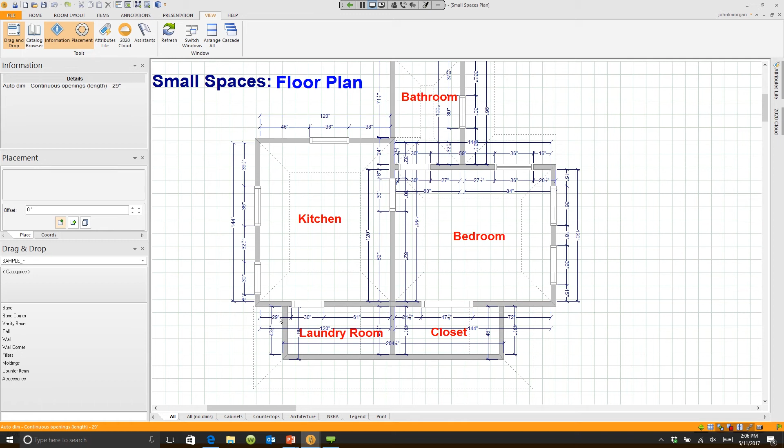Also, you'll notice placement zones. Let's take a look down here at our closet area. When we drew the closet in here, you'll notice that the placement zones are on the outside of the wall. I actually want to place items inside of the closet, not on the outside. How do we quickly address items like that? Well, let me show you. Let's go ahead and close out of this plan. I actually have 4 plans I'm going to work with today. I'm going to go right into dimensions.

Now, I mentioned before, I cleaned the dimensions up ahead of time. That way, we didn't go through all the dimensions. But if you take a look at my system, let me zoom in on the closet area right here. You'll notice a couple of things in the closet section. Number one, I have some overlapping dimensions from this outside wall. Now, I may want to use those dimensions, or I may not. If I do want to use the dimensions, all I have to do is click on the dimension.

Let's click on the dimension, grab hold of the line, and I can extend that dimension anywhere I need. Now it's no longer in my workspace. But a lot of times we hide dimensions. I like to hide dimensions in many cases.

If I wish to remove a dimension from the screen, I simply right-click on the dimension. I highlight it, and there's an option here called Hide. I click on it, that dimension line is gone. I click on this 48-inch dimension line. I don't need the outside of that wall dimension.

I'll hide it because all I care about really is my workspace, which is this 43.5 inches. That's what's important to me. So I can simply right-click on an item, and I can choose Hide to remove it from my screen.

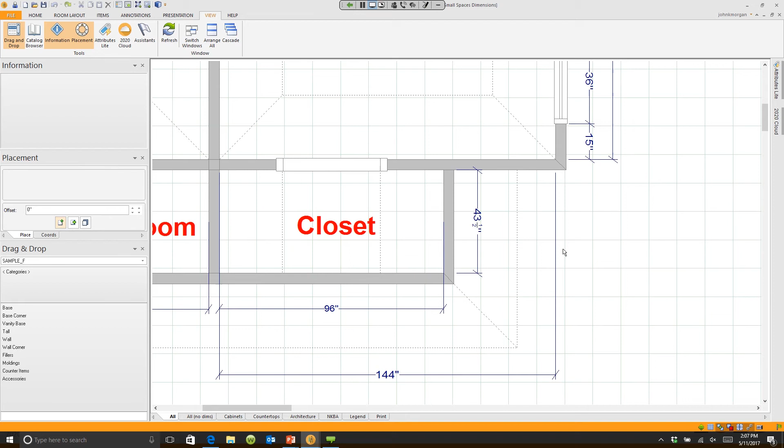Now, where did those dimensions go? Let's say that you hid a dimension by accident, but you want to bring it back. I get that question all the time. Here's the simplest way to do that. Anywhere on your floor plan, not in the work zones, but anywhere on your floor plan, double-click on the plan, and if you give it a moment, it'll open up your display settings.

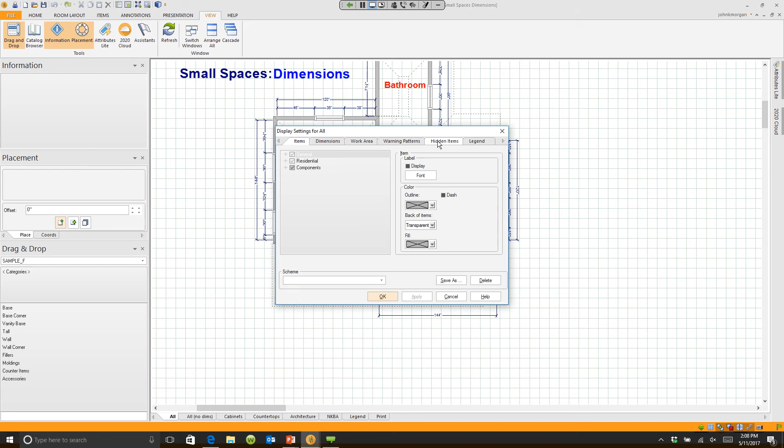The 1, 2, 3, 4, 5th tab over is called Hidden Items, and when I click on it, guess what? All of my dimensions that I hid from that original plan are listed here. So if I move this over and I just click on a dimension, watch what happens. When I click on it, you'll notice down here, that dimension line is the one that's activated.

When I click on that one, it's activated. So you'll see where they are as you click. They'll actually flash on the screen for me as I click, and you'll see the dimension line. For instance, the 204 and the 16th is here. So if you ever wanted to bring a dimension line back, you simply click on it, click Display, and that dimension line will come back.

Now, here's another item that I frequently get asked about. Sometimes when you adjust these dimensions, do you notice the lead and the end line are extended? Most of the time, you're looking to have a dimension line where the lead line is just off the outside of the wall. Well, you can change those.

When I right-click on the dimension and I highlight it, where I was going to hide before, you'll notice there's something here called Extend Left and Extend Right. If I click on Extend Left and move, I can move the left dimension line. And remember, the dimension lines are left because it's left if you were facing that wall. I can move that line down. I can click over here and say Extend Right, move that line down.

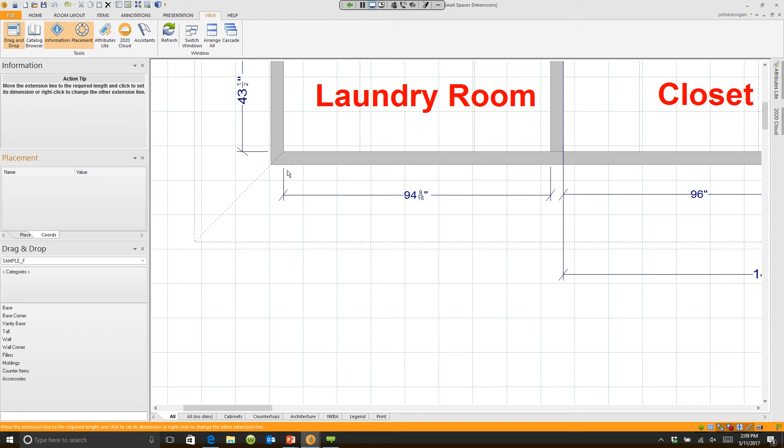And I can do the same thing for this dimension. Highlight it, go down to Extend Left, bring that guy down here, go down and click on it again, say Extend Right. We'll slide that one on down. Oops, hold on a second. I must have stopped. Let me do that one more time. Extend Right. We'll go ahead and we'll bring that on down here.

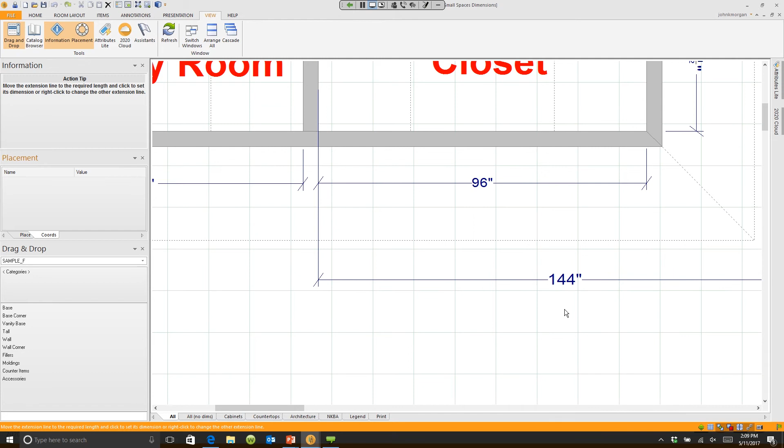Oh, I see what's going on. My 144 Extend Right is actually in the way. We can bring that one down too, and we're good to go. So it's really easy to make changes to your dimensions. Simply by right-clicking on them, you can quickly clean your screen up the way you want it to look.

Now the next question is, how do you remove or change where the boundary lines are for your items? Let's go ahead and close out of this plan. We'll open up the placement zone plan. Same plan, I just already changed the dimensions. So if we take a look at this, let's zoom in.

You'll notice that on this wall, on the bathroom wall, I have extra placement zone lines on the inside of the bath and on the outside of this wall. If we look down here at the bottom of the screen, I have outside placement zones when I really wanted inside placement zones. The easiest way to change this is to double-click on any wall. Doesn't matter which wall.

When you double-click on a wall, it happens to highlight the wall that you clicked on. So if you're only trying to change one wall, click on that wall, and it'll allow you to change it. Now, I already know that the wall's down here at the bottom. I'm going to move this over just a little bit. Wall number 7. If I click on it, it'll highlight wall number 7.

Click on wall number 8, it highlights wall number 8. Click on wall number 9, it'll highlight wall number 9. So I know that walls 7, 8, and 9 I wish to change. I change them all at the same time.

I hold the Control key down on my keyboard, I click, click, all 3 walls are now selected, and while you're in the Properties button, if you click on Type, you can go to the placement zone and turn off either the inside or the outside placement zone.

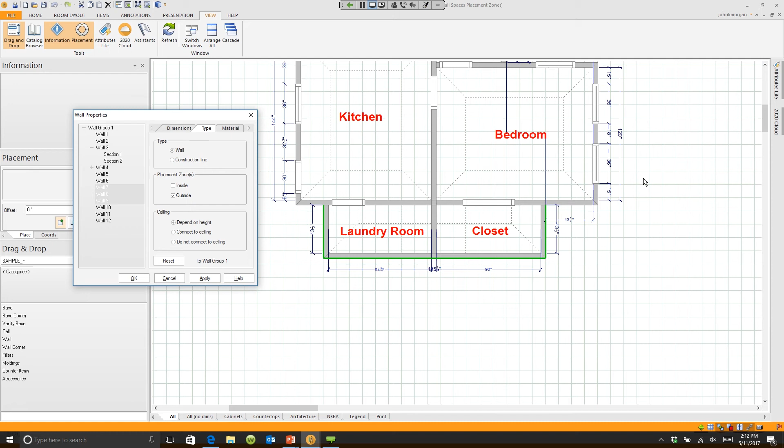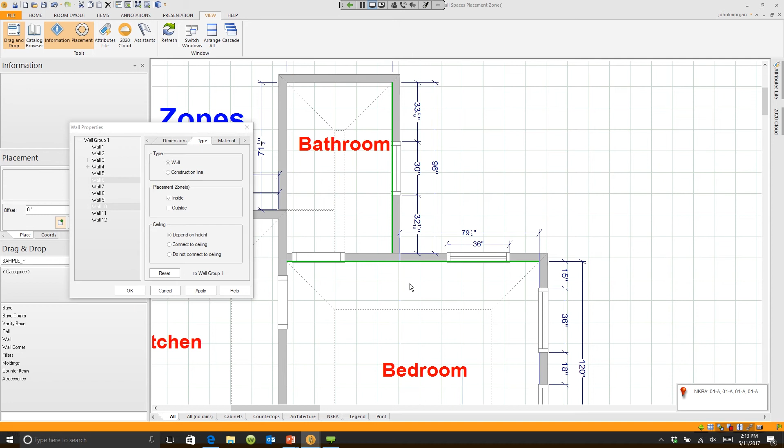Now, the other placement zones that we talked about, let me zoom back up here again, and we'll zoom back in. We're over here. And again, if I simply double-click on a wall, it'll highlight the wall that I wish to change, this 96-inch wall, which was wall number 10, and the other wall happens to be wall number 6. I select both of these. I simply go into Type. I turn off outside placement zones in this case, and all of my dimension lines and all of my boundary lines are going to be exactly as I wish them to be.

Now, you typically don't have to do a lot of that, but I know I get questions all the time about why this is here or why that's there. It's very easy to resolve both of those simply by either double-clicking on the floor plan for dimensions or by coming down here and double-clicking on the wall to move the placement zones.

Now, let's jump back over to our PowerPoint for just a second. Let's move into the second phase, which are going to be some tips for small spaces. I know everybody runs into the same issues when it comes to working in confined spaces and corners in 2020, and you want to be able to quickly place items and have them snap together. Let me give you a couple quick tips for that before I actually start designing a laundry room and a closet. So let's switch back over to 2020.

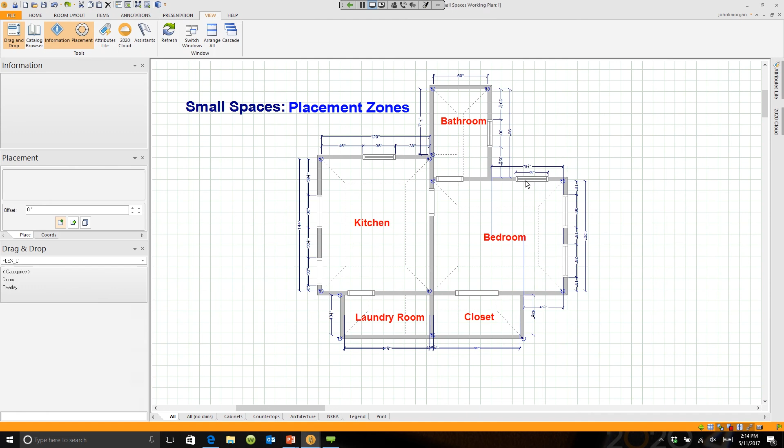We'll come back in. I'm going to close out of the placement zone. And you'll notice that I've taken the same plan. So every floor plan I've shown you is basically the same plan. I just named it different names. And this is the plan where I've designed most of the rooms.

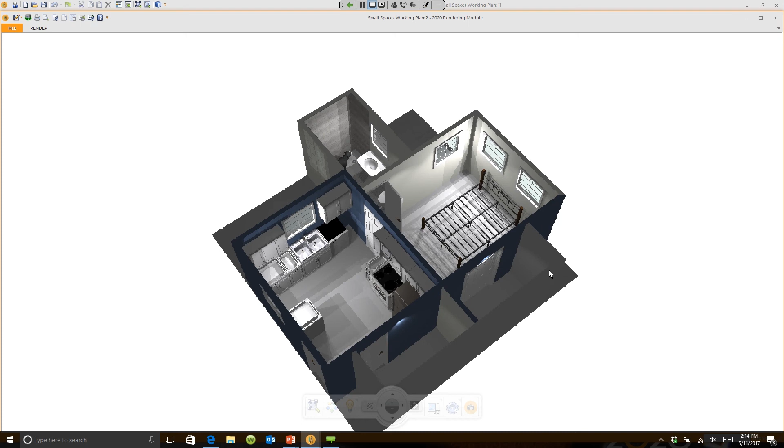Now, typically, before I do anything in a plan, I always draw walls first. After I draw the walls, I create a perspective. I go up to the top, I click perspective, and you'll notice on my screen I actually have a perspective already open of my rooms. And you'll see they look pretty big when you're looking at the floor plan sometimes, but if you take a look over here at my little bedroom, this bed takes up almost the entire room.

Now somebody's going to ask me where that cool, awesome bed came from, or the bed frame. I haven't put a mattress on it yet. That's actually a Trimble or SketchUp image that I imported, and we're going to import some other images later on. So you can get some really cool images. There's literally millions of images that you can use throughout your rooms that you can import from other programs. We'll talk about that a little bit later on.

But you'll see that I have a bedroom. We'll pull back out here. I have a closet. I have a laundry room. This kitchen looks a little bit bigger. It's really tiny.

There's not much walk-through space. When I start opening and closing the doors, you'll see there's very little space in there whatsoever. And we're going to work on a kitchen, on a bathroom here, and I'm going to build a shower and some other items into the bath.

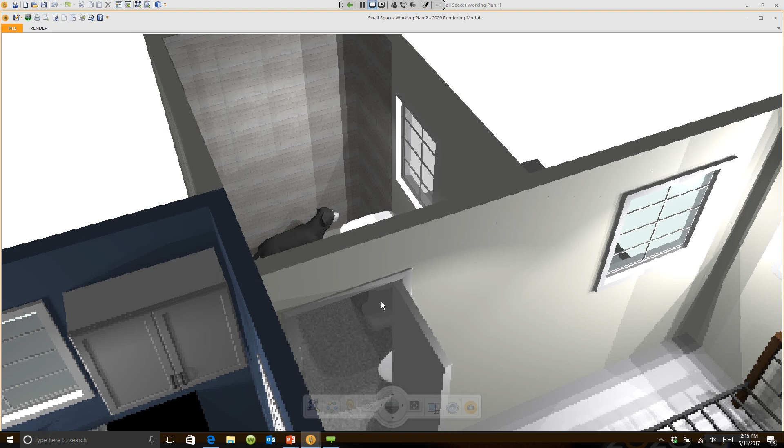So the first thing I want to do, though, is I want to focus on my kitchen. So we're going to focus right here on the kitchen. And I want you to notice something that I do as I navigate. I like to use a perspective, and I actually navigate rooms not through walls. I typically am not walking through doors or walking through walls or trying to move around, because sometimes as you're moving around through items, you kind of lose your perspective of where you're going to be.

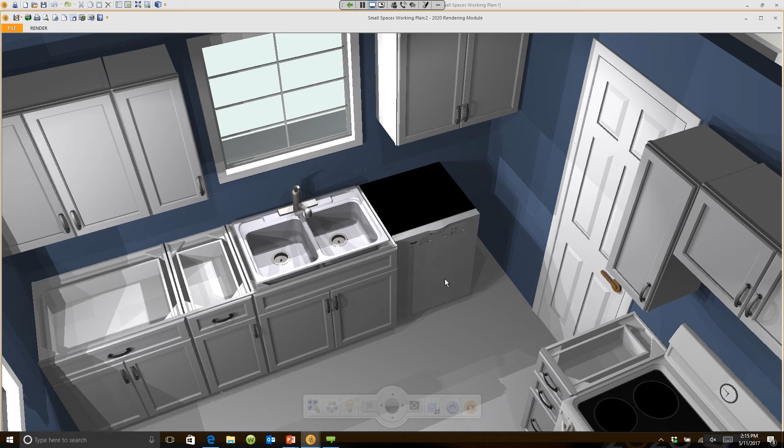So I often will actually zoom out and simply hold the wheel on my mouse and move the rooms around where I want to be, and then I use the wheel to roll back in to where I want to be in that room, and then I focus on that room. Now, right now, I'm a bit above it. Later on, you'll see I'll go down to a normal eye level as if we were standing in the room.

But for me, navigating plans that have multiple rooms, even though these are all tiny rooms, we have multiple rooms together. Navigating works quickest if I move above it, focus where I want to go, and then zoom right back into it. That's a little trick that I use.

Now let's look at this corner over here on the right-hand side. Anybody who's a 2020 user understands what I'm about to talk about when it comes to maybe some difficulties you have in corners. Now, first of all, I noticed that my dishwasher's pushed back against the wall. So let me just click on in, out, and we'll slide this guy right on out here to the front, and we will line that up properly.

Now, if you look here in this corner, you have a diagonal line. If I take my cursor and I put it to the right of the diagonal line, when you look at this box over here, the information box, it tells me that I only have 22 inches of base space from the corner to the wall, to the door trim. If I move my cursor to the other side of that line, it tells me that I have 15 3/8 of an inch of space. So I can put a base 15 in there.

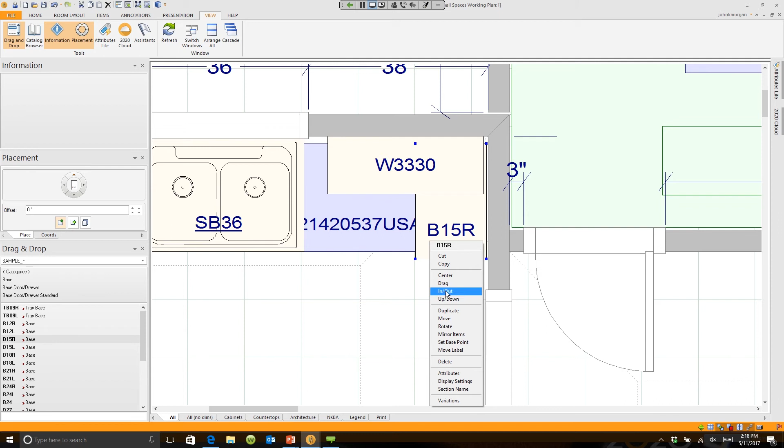Here's the fastest way for you to put that cabinet in the corner. Click on the dishwasher, the item on the left. Double click on the base 15 in the list, and it will snap it right into place. Now let me back that up. It actually snapped it in because I just moved my dishwasher forward. So it actually snapped it in a little bit forward, but it snapped it right into that place. If I zoom in here and look, there we go. I have a filler space left, which is very, very tiny.

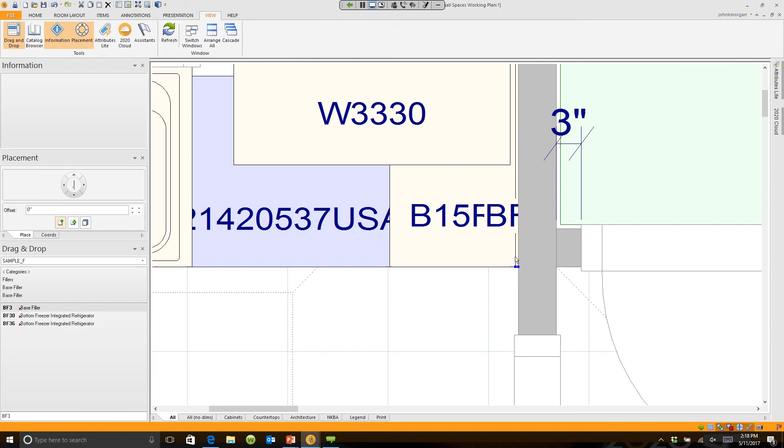I can do the same thing. I can click on the base 15. I can drop down here to my drag and drop, to my search, type in BF3 for my filler. If I double click on a 3-inch filler, it automatically puts the filler in there, and it trimmed it to fit. I know a lot of people move everything out of the way, then they move the cabinet in or the filler in first. You don't need to do that.

All you need to do is click on the item on the left, double click what you want in the list, and it will snap into place. Now typically I'll get the question, or the comment, hey, that doesn't work on the left. And you are correct. That does not work on the left.

Let me show you how I normally place things in tight spaces, especially something like a filler. Let's go ahead and undo what I did. I'm going to undo both the cabinet and the filler. Let me zoom back out of here again, and I am going to double click in the workspace on that wall so that I can open up an elevation.

When I work in confined and tight spaces, and I want to make sure that I place something, let's say in this space right here, and I don't want to worry about what's happening on the other wall, I actually almost always do it in elevation. So if I come down here and get a B15, I can grab a base 15, simply drag it over to the space, drop it into place.

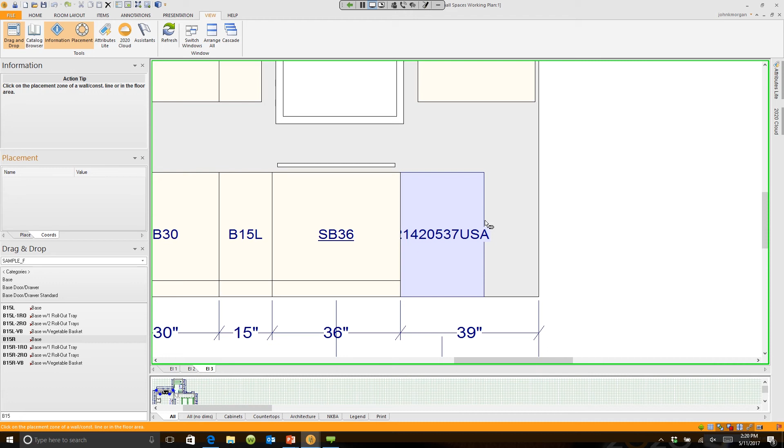Whoops, it's going to tell me it's not available. Here's why. I was too far to the right. If you drop it over here, it always measures left to right. There's not enough room. If I take that and drop it right next to the dishwasher, though, there's plenty of room for that. I say plenty of room.

Actually, if I zoom in and you look right here, I think I only have like 3/8 of an inch or something left over. But you can go in now and simply say, I want the BF3. I can drag that over, put the tip of the arrow in that open space and drop it, and it trimmed it to 3/8 of an inch.

So that's one of my favorite tricks when I'm talking to designers and they say that they're in a small confined space. How do I work in corners? How do I make things work? My first comment is open up an elevation. Because once you open up an elevation, it's only concerned with the space you have on this wall. It's not worried about what's on that adjoining wall right now.

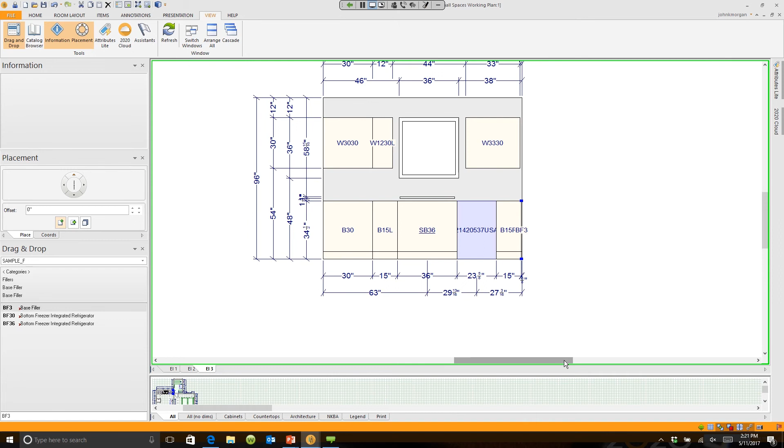Now, if there is something that will conflict, it will stop you from doing that, but it's not going to try to turn things on angles and diagonals and things like that. So that's pretty cool. So let's go ahead and minimize this screen and go back to our floor plan. So that's one quick tip that I have when it comes to placing things in corners.

The next thing I want to move to is something that's a little more fun now. Those were basics. Let's start talking about how we actually design in these rooms. And let's start with closets. I'm getting more and more questions when it comes to closets. Everybody wants, when you have your crew in a house, to be able to work in more rooms of the home. Because if you're working in more rooms, that means you're making more money. So more rooms, more money is what I always say.

So let's go back and take a quick look at our plan. I'm going to go back to my floor plan, and down here is what I wanted to make my master closet. And the best way to organize in a small space is to be able to create an environment like this, organize it with shelves, drawers, and everything to maximize the usage of this small room. So here's how we're going to do that.

First thing we're going to do is open up an elevation. And if I pull this down, you'll notice that tab number 2 is actually already an elevation of that wall. So we're going to work on this in just a moment. The other thing that I want to do is, actually, let me go ahead and just make that full screen for you so it'll be easier to see.

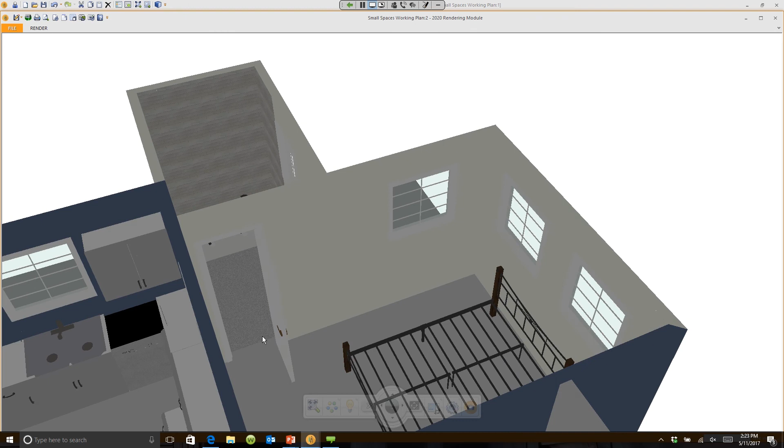The other thing I want to do is talk a little bit about navigating in a perspective. So here's my perspective. I mentioned that when I'm moving room to room, I typically will move out of the room into the ceiling. I might move in, and let me just turn this a little bit, and I will tilt this and actually move, let's move in just a little bit more and kind of move my way down so I'm standing, and I'm going to look up, and I'm going to look right at this closet door.

Now, there's a couple of things that I can do here. I can actually open that closet door if I want to and look inside of that room, or I can remove this wall. Does anybody know how to do that? There's actually a couple of ways to do that.

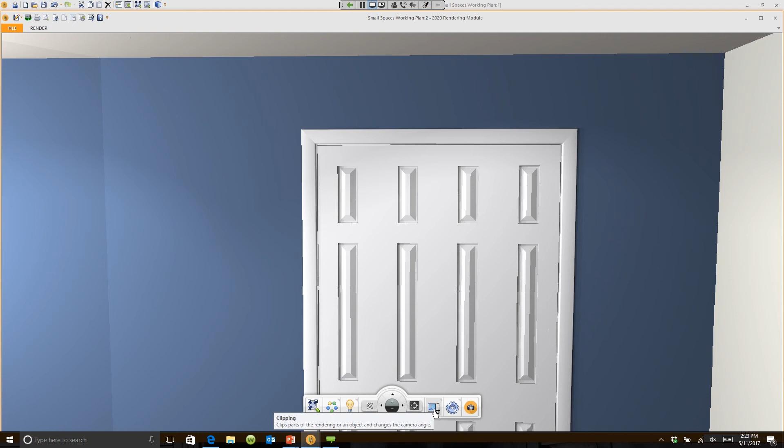When you're working in a perspective, see the little ghost toolbar down here at the bottom. Right here in the center where you have your little dial where you move right, left, up, and down. If you move to the right a little bit, the feature just to the left of the gear is called clipping. Now before I clip, let me just adjust so I can move down a little bit closer to the floor and maybe just take one more step backwards.

Let's do that. Okay. Now, when I click on clip, you're going to see a little floor plan down here at the bottom. If you roll your wheel in on the floor plan, you'll see where you're standing. I'm standing right here at this camera. I'm looking forward. And if you choose to turn this item on right now where it's called Enable Disable Clipping, I'm going to enable it.

If I move forward, a little red circle will move forward in that little plan that you see, and everything that red circle touches, it makes it disappear. So if it touches the front edge of your bed, your entire bed will disappear. If it touches the wall, like I'm about to do, watch. When I touch the front edge of this wall, that wall disappeared. I'm actually looking inside of the closet. This is the back wall for the closet.

Now, there's another way to do that too, and that is if I click on the clipping option, see right here where it says camera? For anyone who has used 2020 for years, there used to be a feature in 2020 where you would move a line forward and it would literally stop drawing at that line. And if you put that line right in the middle of a base cabinet, it would actually cut the base cabinet in half and show you half a drawer, half a door, half of everything.

Well, if you choose camera, that's the old feature. That will literally cut anything in half that it's touching, whereas the object button makes the whole object disappear. I tend to use the object button. I prefer that, but you could always use the camera button. But again, remember where it is, at the bottom of your screen where the gear is.

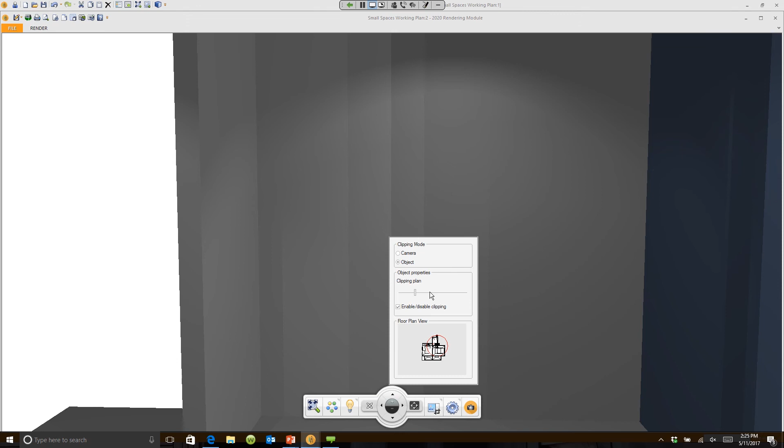Click on this feature right here called clipping, put a little check mark next to enable, and then you can slide this forward and that circle gets a little bit larger and everything it touches will disappear. So now I'm looking into my closet. So it'll make a lot more sense once I actually build a closet. Now, before we move into building a closet from scratch, let's do a couple of quick things.

Let's talk about catalogs. You'll see here in your list of catalogs, as I scroll down, I've downloaded a couple of catalogs. Did you know that 2020 has a ton of catalogs that have closet information in them, closet components, real-life closet components that you can use? For instance, if I download the task lighting and I go in and choose interior closet rods, I'm just going to right-click on the 30-inch closet rod and I hit View in Place.

It's asking me if I want to load another catalog, and I do. Did you know that you can put a task lighting closet rod in that's LED lit from the bottom? So you can actually turn your closet rods on inside of your closet, and I can tell whether it's a blue or a black suit in the dark. Great little feature. I can also go into, let's say, Rev-A-Shelf, which is my next one listed.

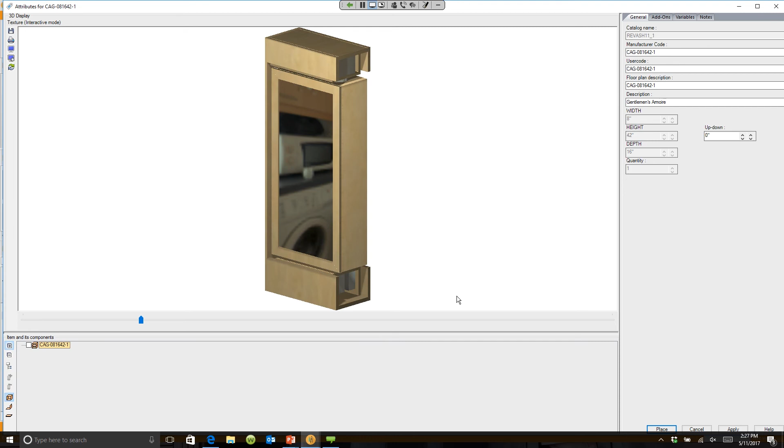Rev-A-Shelf has a whole catalog full of closet components. I can go in here and say I'd like to look at armoires. I'd like to go and choose a gentleman's armoire, and I'd like to click on View in Place, and I can turn it, and it actually has a mirror on the other side, which will reflect what's in the room. Talk about great use of space. I can go in here and choose other items, closet mirrors, jewelry stands. I always liked lazy shoe zens. I think that's pretty funny.

So, if I clicked on a lazy shoes in, you'll see that I have a revolving shoe rack that I can put in the closet. These are catalogs that anybody who uses 2020 can access. If I go down one more, let's just drop down one more. There's one I was using at KBIS a lot that I really liked, Lifespan.

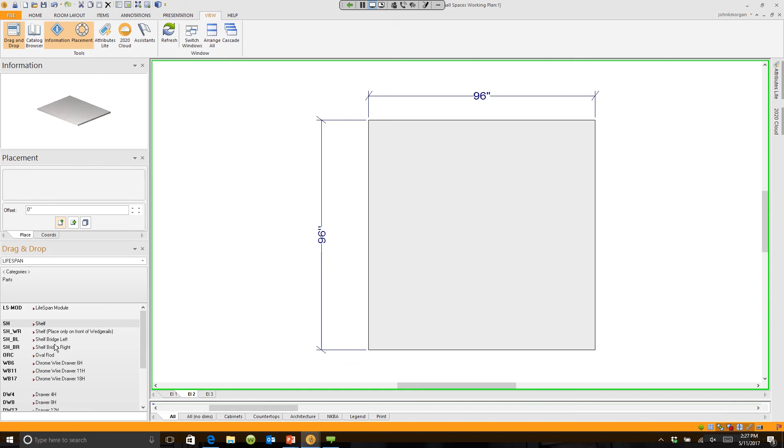Lifespan actually has all the closet components. Shelves, you'll see the previews here at the top. Rods, drawers. You can see I can pick a 4-high, an 8-high, a 12-high drawer. I can pick doors. So I can build closets by component. I can even go into the accessories and say, I want a tie scarf organizer, which you'll see here. I would like to have a tie belt or a pull-out or a shoe rail or anything else.

Now, the next question you should be asking me if you're not using these is, where do I find these? Pretty easy. If you go to our website, 2020.net, really simple, 2020.net, just type that in. If you go into 2020.net and you log in, if you haven't logged in before, you need to sign up and create a login based on your security number, your KCDU number for 2020. Go ahead and sign in, and when you do that, it takes you right to manufacturers.

You can click on this arrow, and you'll find all sorts of manufacturers' catalogs for all sorts of products. We're talking about closets right now, but this is where you download them from. So write that down, 2020.net. If you're not doing that, the catalogs I'm showing you right now, I downloaded Sunday. So they're all sitting there. You can do all the same things that I'm doing right now.

Now let me go back into our plan for a second, and let me show you something else that I really think is cool. If you're really looking to expand your business and sell closets and be able to meet the needs in small spaces, 2020 has another option. Now this is an upgrade that you would have to do to your software, but let me show you how you do this. You can actually upgrade your software to be able to use what we call Flex. I'm going to click on Flex. It's a module that you add to 2020.

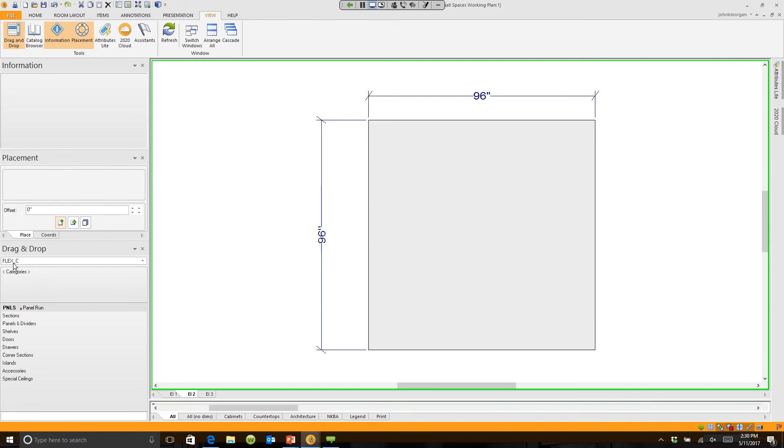And let me show you why so many people, and I'm going to tell you right now that when people are purchasing 2020, more than a third are actually doing closets as well, and they're purchasing the Flex catalogs too. Let me show you how they work. If I take a panel run, drop it into place, it's going to ask me some questions. Clearances, right, left, default sections, heights. How many sections are in your closet?

I'm going to tell it that I want 3 sections in this closet because I have a really small bedroom. You saw that my bed takes up, I got a queen size bed in there. It takes up almost that entire room. I could probably get 1 dresser in there comfortably, and everything else I'm going to be stubbing my toe as I walk around that bed. So what I need to do is maximize my closet storage. So we'll click OK on the 3.

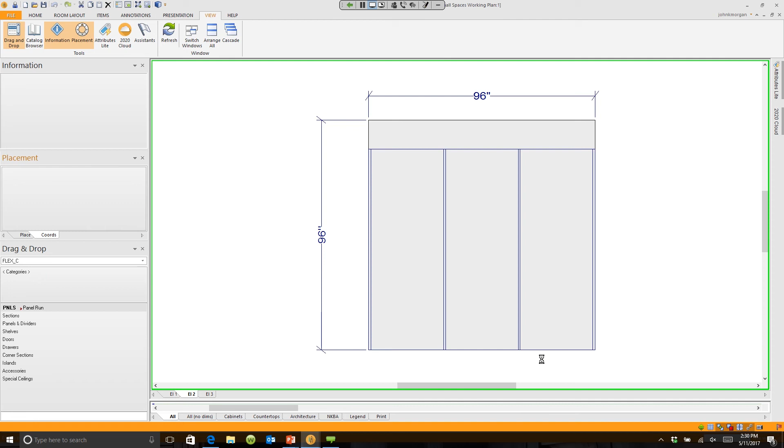I will simply expand it to go all the way right to left. And we'll give it a second, and it's going to build all the components. So it just went around and figured out all the components that it needs to build this unit. And I can get a list of these components. Now, if we go back and take a look at our perspective, you'll notice there's a closet here. 3 components of closet. I'll talk about lighting in a minute. We'll make that a lot prettier later.

Now, when I go in and I place these items, so we've placed all 3 items, I can modify these just like I can modify any item that I would place. I can go in and say attributes by right-clicking on it. It comes up and you'll see that it's kind of translucent right now, but if I right-click on it, I can have it with an outline mode. If I right-click again, it can be wireframe, but there's my closet. I'm going to go to the variables tab. And I know half of you use variables, half of you don't. I use variables all the time for lots of things, and you're about to see why.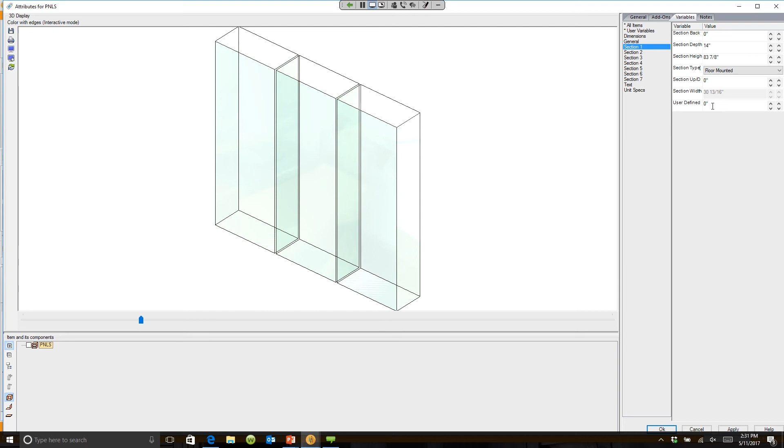If I click on section 1, it's always left to right. Section 1 is the left. I can come down here, and right now it says section 1 is 30 13/16 of an inch. I want it to be 24 inches. When I click OK, that is now 24 inches. And if I go back and take a look at this, 24, 34 1/4, 34 1/4.

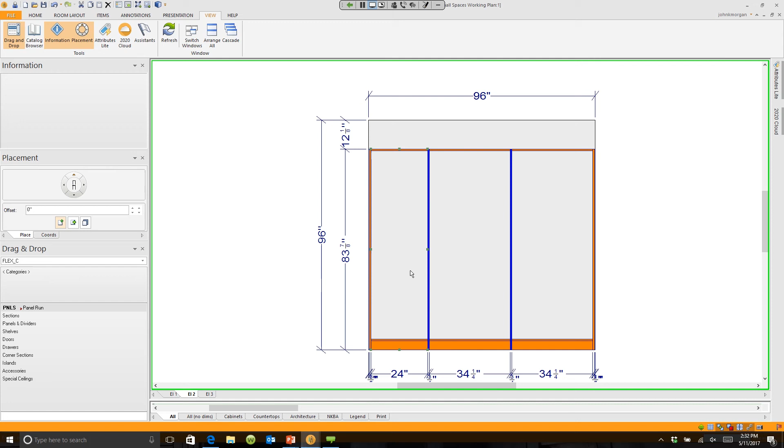What 2020 does is once you dimension or change the dimensions of one item, it'll take the rest of the space and divide it equally by the sections that you defined. So we made that 24, and I could define each one if I wanted, but I'm not going to do that right now. So let's go back in here. So here we are. We're in our section. Now I can start to populate this. Now let me explain how brilliant this is.

If I go in the shelves and I choose a fixed shelf and drop it, watch what happens. As I move, it jumps. What's it jumping to? Every time it jumps, it's jumping to a drilling in the panel. It knows, it's a 32 millimeter system, it knows where each drilling is, where each shelf hole would be on this panel. So it automatically jumps to that shelf hole. If I go to an adjustable shelf and I drag this over and do the same thing, you see it sized, it cut to the opening, exactly with the opening because it knows the panel thicknesses and everything.

As I move up and I stop right here, what I want you to notice is these do not line up. If I grab hold of this and I move this, it jumps. It doesn't line up. Why doesn't the fixed shelf line up with the adjustable shelf? It's because it's smart. It knows that there's a pinhole right here. A fixed shelf has a pin that goes right into the pinhole and is in the middle of the shelf, whereas an adjustable shelf sits on top of the pin. They don't line up in real life. And it doesn't here either because it's smart. It's intuitive. So let's go back and let's delete these and let's build a quick closet.

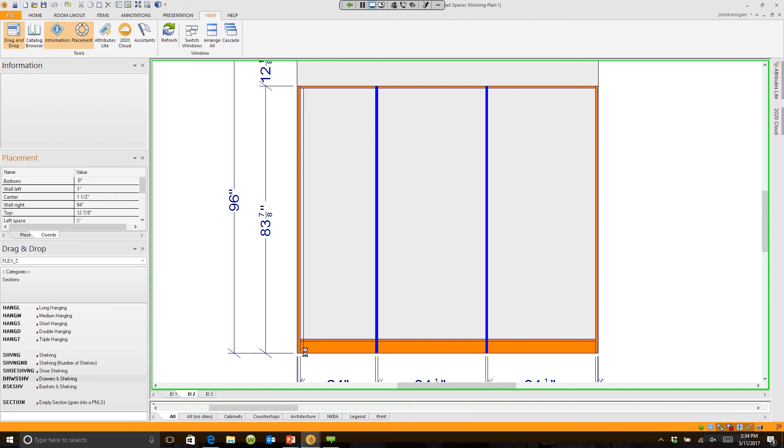So let me drop down here again. So I was just putting shelves in. Let's go and do something quickly. We want to go in here and do sections. I'd like to put some drawers here with some shelves above it. Well, I can just drop down to a section and say drawers and shelving. Drop it into place, slide it over and click. And when I click on this, it's going to take a second, but it's going to build this out with drawers and shelving.

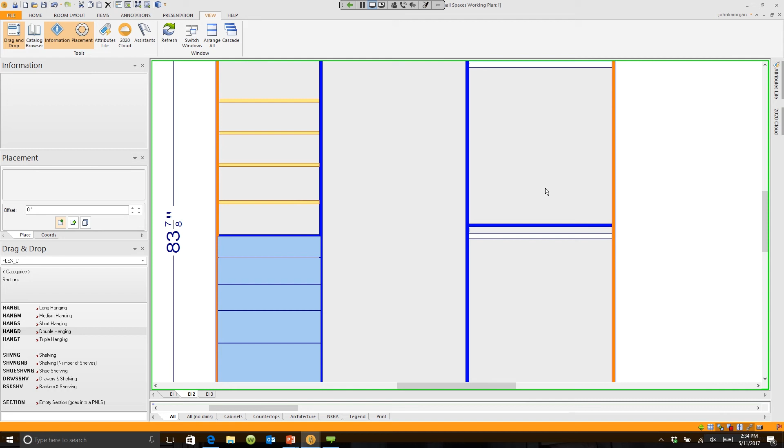Maybe I want to use the right-hand side to hang. I actually hang all of my clothes, so I really just want hangers everywhere. But some people are going to fold, some people are going to hang, so let's do a double hanger. So we'll come over here to the double hanging system, drop it into place, click on it, and it'll drop it in, and you'll see now that you have two hanging sections. All the components are real sized, and we know the dimensions, and we can print out all the components it takes to build this.

Now, center section. Let's say we go back. We go in here and we choose shelves, actually, is what I wanted. I'm going to put some adjustable shelves in. I'll just drop it in. I'm going to go up here and kind of snap it in there. We'll move in here. We'll put another one in. I'm going to snap it in alignment with that drawer. We'll put another one in, and maybe we'll snap that one in here. Maybe I'll just put one more here in the middle, and that's my section. I have built a closet that quickly. If I go in here now and take a look at it, there's my closet. That fast.

Now, let's say you want to put a door on that side. Okay. If I come back down here and I choose doors, overlay door, I'd like to drag a door over and I'll drop it. Watch when I drop it. If I move, it actually sizes the doors depending on where I am. I want to put a door there. If we come back and take a look at it again, it has a door on it. Not only can I do that, but I can decorate it too.

I can go in, let's go ahead and move this up just a little bit. I can go into 2020 Cloud. I hope everybody's using 2020 Cloud. If you're not using 2020 Cloud, you better daggone register for it right now, because I will tell you that I use it constantly in my designs. In the next half an hour that we have left, you're going to see me using it constantly.

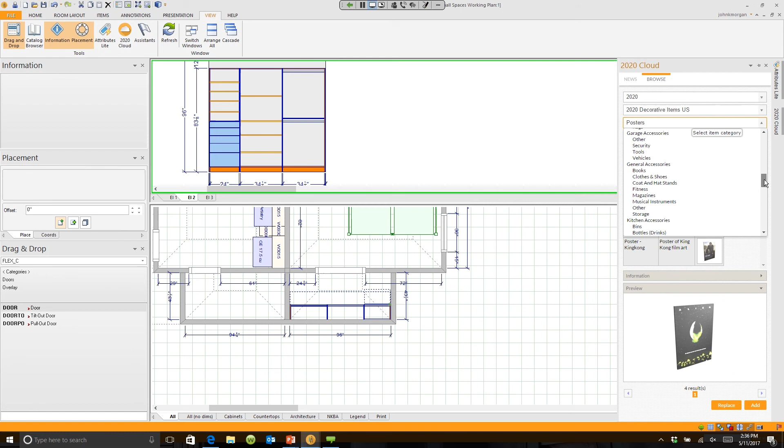I'll go in and I'll choose something. Like I'm in the generic 2020 catalog right now. So let's go in here and let's choose a category. So we're going to go up and I'm going to look for clothes, which I believe are under the general items. So we'll scroll down here. There's some clothes, dresses, shoes, pants, so forth. I'm going to go ahead and grab this hanging skirt. We'll go ahead and we will click and put this on the plan.

There it is. See it moving around? I will turn it. I'm going to move this over, and I'm going to put it in the third section here. We'll drop it in. You can see it right here. If I move up, drop it on the hanger. Let's go back and take a quick look. I have a hanging skirt now in that closet rod.

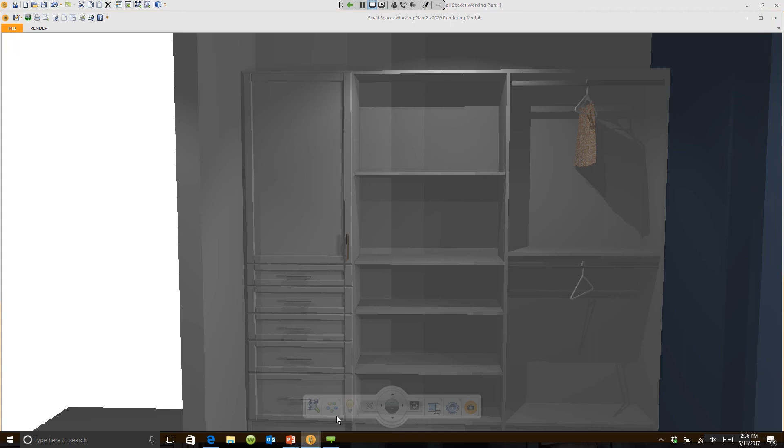If I wanted to go back again, let's say we go back in here again, back in the 2020 Cloud. I'll scroll up and grab, let's grab this pair of shoes right here. I'll go ahead and I'll say, okay, let's add these. We'll float these in. I'm just going to snap them in here to the center section. And if you give it a second, I can grab hold of this. And I'm going to move it up. And let's say we sit it on the second shelf.

Come back in here, take a quick look now. I have a pair of shoes, which are backwards. I should have turned them around. That's my fault. But you'll see that the shoes are snapped in and the hanging skirt's snapped in there as well.

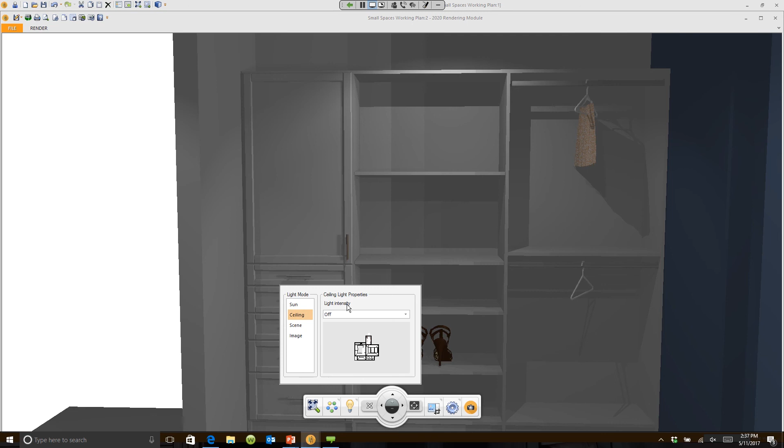Now, let's address lighting for just a second. Everybody should be looking at this and going, hey, John, it's pretty dark in that room. How do we adjust that? Let me give you a couple tricks. Number one, if I click on the light bulb, choose the light bulb, there's an option here called ceiling. A lot of people, when they work in these small rooms, will go under ceiling. They'll turn the light on to 60 watts.

And if you look right down here, see right down here, there's a little yellow circle here. You can move that light around anywhere you want. So I can adjust where that light is. Notice the shadow on the skirt changing on my screen. And even my backward shoes are showing the toe openings with the shadow. You can move that around.

Now, a lot of people don't like this light. And here's why. You notice it makes kind of like a really bright circle up here at the top? A lot of people don't like that. And I don't like that either. So here's what I typically do. I actually don't turn that light on. I use lights from the Room catalog. There's a catalog here under drag and drop called Room.

If I go into the Room catalog, let's take just a moment to move down here. I'm sorry, I keep saying room. I meant room furniture. Correction. Anybody watching the recording of this. Room furniture. I'm going to go down here to lighting fixtures. I'm going to take a recessed light, and we're going to take a spotlight, just a recessed light. I'm going to drop it right here in the middle of the floor.

And let me show you something I'm going to do with this. It's pretty cool. Let's zoom in on this. Actually, we can get rid of our elevation now. So let's zoom in on that light. Here's something I do that's pretty cool. Number one, I right-click on it and I go to its properties. You can make it whatever brightness you need. I'm going to say it's 60 watts.

And see down here where it says profile? That shows you how it's going to disperse the light. So if I come down here and say round, you'll see that it has more of an even dispersion of the light. If I had clicked on tight focused, that's a very narrow light. You know, we could use that under a cabinet or such, but let me just go ahead and do round.

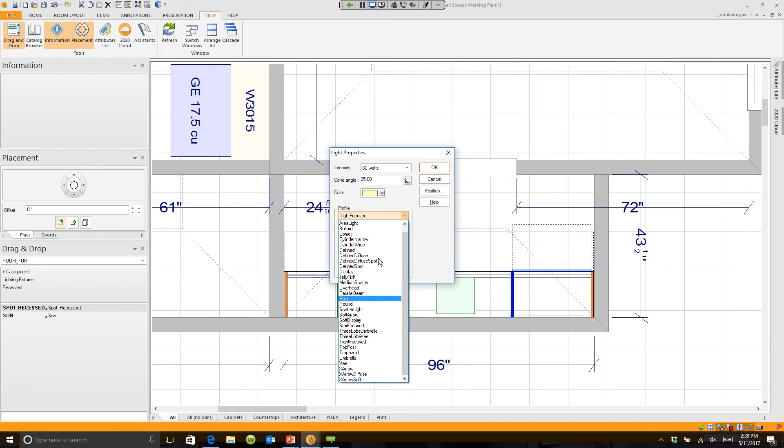Excuse me. I'm going to do one more thing. I'm going to double click on this light because I want to show you something. This light has properties. Hold on just a second. Let me do that again. This light has properties. If I can open it back up again.

So let's right click on that. There we go. For some reason it didn't do it the first time I clicked on it. So let's go into the light, and I want you to notice that this light is this lovely black cylinder or circle here. A lot of times people want to put lights in rooms, but they want to hide them. They want light, but they don't want to see the light. Let me show you a little trick.

One of our top designers, a guy down in Northern Virginia, Anthony Johnson, taught me earlier this year. If you go into variables, there's an option right here called properties. See where it says display 3D? If you turn this off and say no, the light disappears, but the light is still there.

So if I were to go back and take a look at my perspective, there's still light. See the light coming down through the shelves right here? There's still a light. But if you were to look at the ceiling, look up, there's no light in the ceiling itself. It creates light without showing a light.

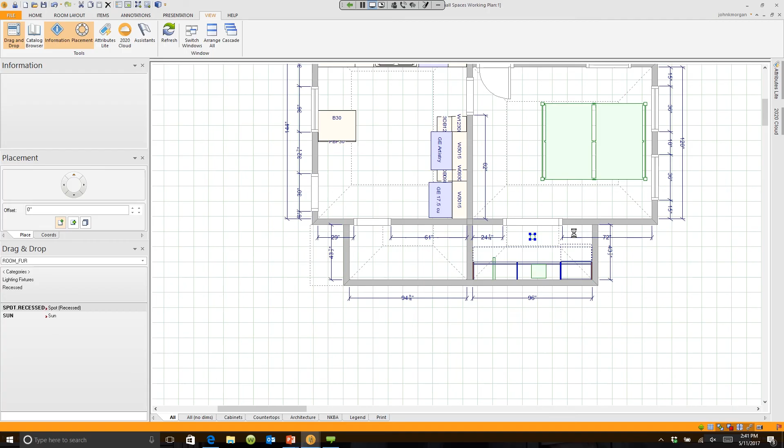So again, the way we did that was we right-clicked on the light, we went to its attributes, we clicked on variables, and under the feature called properties, we simply changed the answer to no, and the light disappears.

Now I could take this light, and I could say duplicate. I'd like to put one here, I'll slide this one over here, I'd like to right-click on it again, duplicate it, we'll click here, we'll slide this guy over here, and then if I come back in and take a look at my closet, look at the difference in lighting. Matter of fact, look at the skirt. You can actually see there's a pattern on the skirt now, and you see reflections and so forth.

But I'm really disappointed in myself that I have the shoes turned the wrong way. We can always go back and turn those around. So let me come back in. Let's take my shoes. I'm going to move those out to here, and I'm going to turn them. I'm going to move them back in. We'll snap them back in. Let's bring our elevation back up so that I can move my shoes back up. And let's go back and take a quick view of this again.

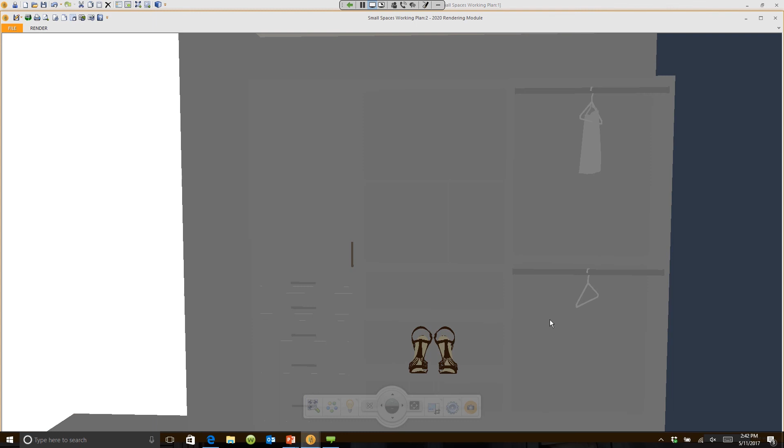And now my shoes look better. I can now sleep well at night tonight.

So there we go. Now, let me close back out of here because there's other rooms that you may be working in that are small rooms that are very similar. If you move into shelving and clever storage, I've noticed a lot of things online, and you can see I actually pulled out and attributed a number of these items from online where they have recommendations, and all small design.

Everything I see is shelves, storage with shelves, and a lot of those aren't shelves. They're actually drywall and 2x4s and things like that. They're not shelves that we're buying off the shelf. We're actually building those in place. Now let me show you how you can do something like that as well.

So let's come back into our 2020, and there's our closet again. Let's take a look at our floor plan. So I'm going to minimize this, and let's zoom in right here. This is where our laundry room is going to be. Now if I go over to my catalog right now, let's say we choose the GE catalog.

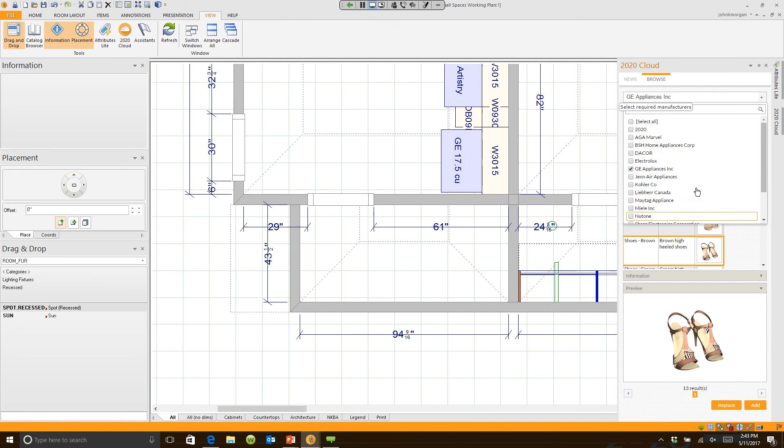If I choose the GE catalog from my cloud catalog, and I click here, you'll notice that I have a plethora of GE electric dryers. If I go in here, I can choose washers. I can place them in there. But you know what? They're not going to work in here because this isn't deep enough. If I put a 31.5-inch deep dryer in here, I'm not going to be able to squeeze into the room, nonetheless open the door. So in an application like this, I really need a top and bottom.

So what I'm going to do is I'm going to come back over here to our regular appliance catalog. I'll go to laundry, and I'll choose a washer-dryer combo, drop it into place, slide it over. There's my washer and dryer. Now see this space right here?

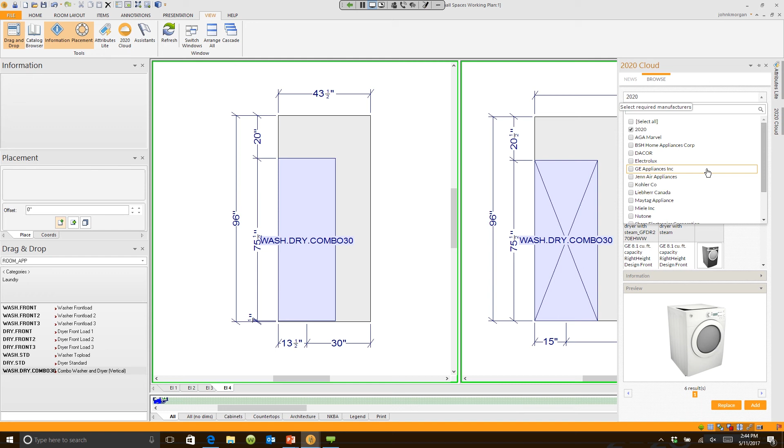If I click within the boundaries of both walls, I can double-click on these. And if you give me just a second, what will happen is it will open up an elevation of both walls. I can now add shelves. How would I build shelves? Well, first of all, if I go over to the cloud catalogs and I change back to my 2020 catalog, if I go and I look for shelves, you'll see that shelves are actually listed in a menu here.

Hold on just one second as I move across here. If I go up to the decorative items, so let's move down to decorative. You'll see shelves and brackets right here. Well, we have a list of shelves. So if I wanted to put brackets underneath of a shelf and I was going to place a shelf on top of it, I can do that. I can slide this bracket over. But because I'm already behind time, I'm not going to put those in.

I'm actually going to show you how I would build a shelf. Here's how I would build a shelf. I would go to the 2020 catalog called Room. In the Room catalog is a feature called Architectural Elements. When I choose architectural elements, there's a feature here called Custom Shape, and I love custom shapes. I use them constantly. So I'm going to go ahead and click on Custom Shape. I'm going to choose a horizontal shape, and I'm going to drop it up here.

Now, why am I dropping it up here? I'm dropping it up here because I need room to modify this. If I tried to drop it here, it wouldn't go in. So I'm going to right-click on this and go to its attributes. I'm going to change the size. I'm going to say the width is 15 inches, the height is 2 inches, the depth is 15 inches. I'm going to go to variables. Remember I talked about variables before, about adding textures?

I'll click on the texture and say, you know what? Let's make this wood. I want this to be furniture wood, generic wood, and I'd like it to be a walnut shelf in a semi-gloss finish, and I'm going to choose walnut with a horizontal grain. Click it. There we go. If I click OK, I can now take this shelf, slide it over. I need to hit drag, actually. Drag it over, and then I can place it here.

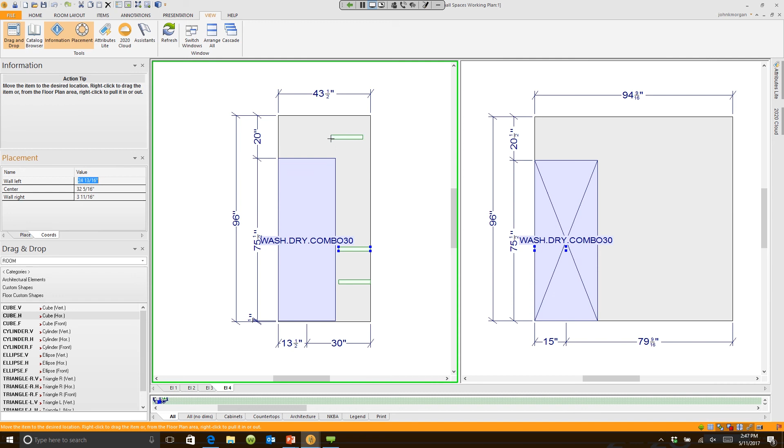I can go in and say, let's duplicate this. So let's place another one here. Let's duplicate this one. So we'll go in again. We'll duplicate it. Oops, hold on just one second. My mouse is giving me a little bit of a fit here. Let me do that one more time. Hold on. Okay, one more time. Let me just duplicate it up here. That way I can slide it down. But I can put my shelves in anywhere that I want.

And if I come back and take a quick look at this, and remember, I like to tilt, come back out of the room, I adjust where I'm going to be, and I can either look through the wall, or for right now, just for expediency, oh, I know what's going on. I have left my clip on. I don't want my clip to be turned on. So I turn my clip off, and now I can move over here, and you can see that I've added these shelves to this room. Now I can also do this.

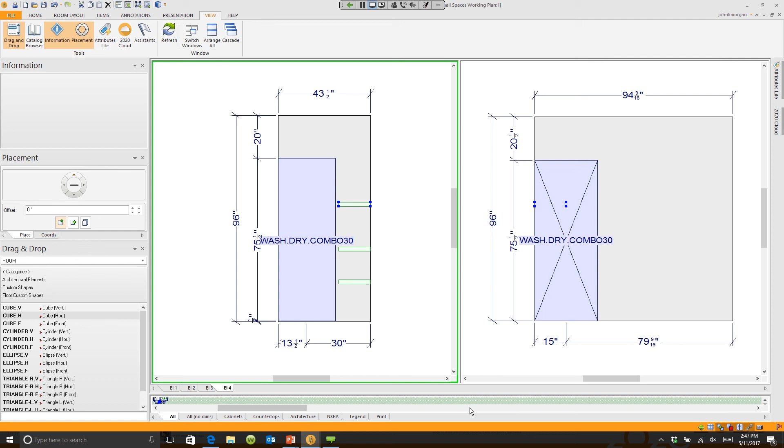Did you notice that when we go back to our PowerPoint, that these shelves all have horizontal and vertical pieces? They're actually building intricate systems for shelves. You can do that too. So if I go in here and say, this is the other wall. The wall that you're looking at on the right is this wall right here.

So I can go in and say, I would like to duplicate this. And I'm going to place it on this wall. But what I'm going to do is I'm going to make a slight modification to it. First of all, there's not enough walk-through space on that shelf.

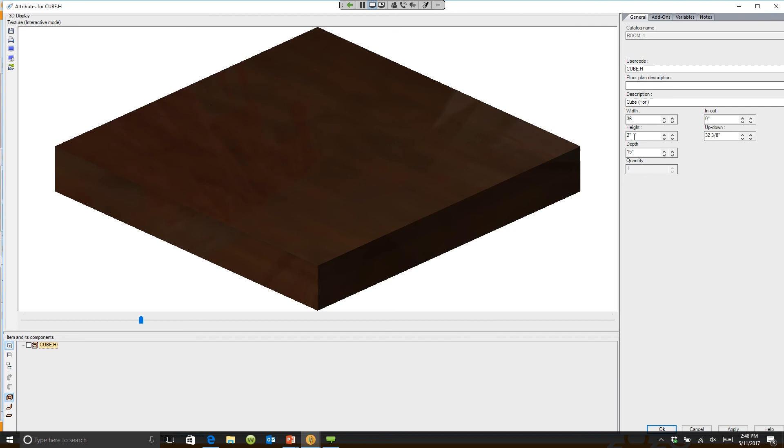So if I right-click on this shelf and go to its attributes, I can go in and say its width is actually 36 inches, its height is 2, but its depth is only 12 inches. I need 3 more inches of walk-through space.

So I'll take this shelf, I'll drag it over, I'll right-click on it, and I will say drag. And then I'll take that shelf now and I'll say duplicate. We'll duplicate the shelf. We'll move it over. We can move it up. We'll snap it into place. And I'll take this shelf and I'll say duplicate it. Click here. Slide it over.

Now, I'm just doing this with the mouse right now. Obviously, you would figure exact dimensions. I can go ahead and click this again. We'll right-click it one more time. We'll duplicate it. And let's make some horizontal pieces.

So when we click on that, all I have to do is go into its attributes and change it. It was 36 inches wide. I actually want it to be 2 inches wide. I want it to be 45 inches tall. We'll adjust that in a minute. And then I want it to be depth as 12 inches. That's fine. I'll click OK.

And when I click OK, I can take this, move it up and down, and I can actually slide it over, by using drag, to be a part of these members. So I can move this over. Actually, let me just leave it as it is. I'll hit the Control key, and I'll move it over and say, I want to put one here. And then I will take that piece. I will duplicate it. We'll put it back out here again. We'll move it back down. We'll move it back over.

Now, how am I getting it to slide inside of that unit? I'm getting it to slide inside of that unit by holding the Control key down. The Control key allows me to break the barrier, and that's why these lines are red. But don't worry about the lines being red, because if you're going to build that in the field, you're going to take care of this. You'll cut everything so it fits appropriately.

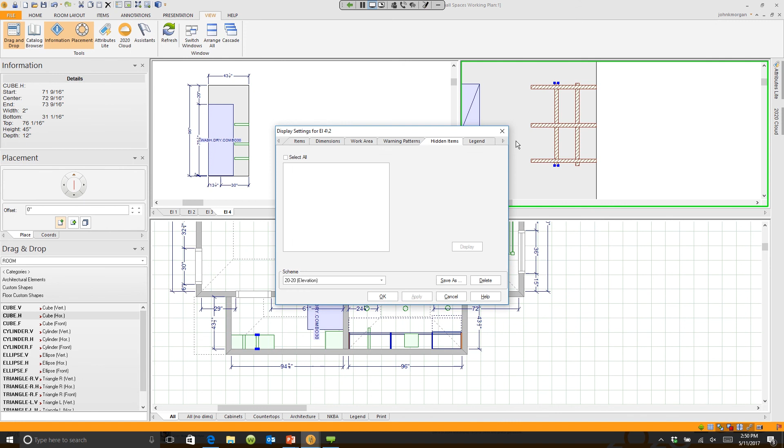I can actually right-click on the screen and go to Display Settings. And under Display Settings, I can simply tell it, under Warning Patterns, to turn off the red lines. That way we don't scare the customer away, because we're going to make this right in the field. We're just trying to make something that looks gorgeous for the customer.

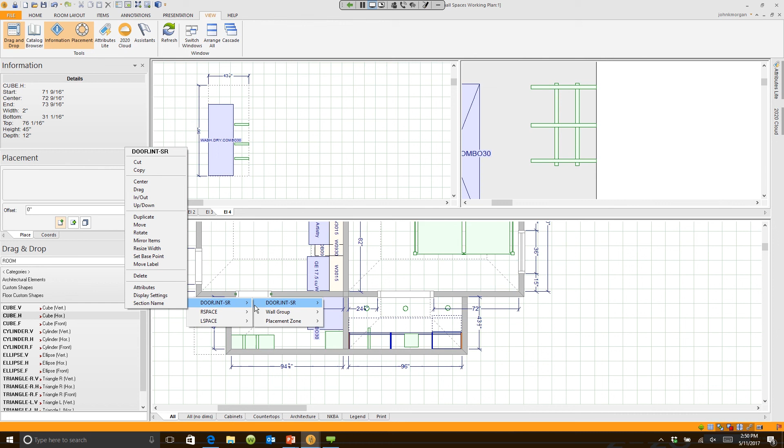So if we come back and we take another look at this, actually, let me come down here, and let's do something a little bit different this time. Let's open that door. We'll take this door. I'm going to go into the door itself, highlight it, go back into its attributes. Remember I told you I use variables all the time? I use them all the time. See where it says open door? I simply type in 90 degrees. When I click OK, that door is open.

When we come back and take a look at our perspective, you'll see that the door is open. I can walk into that room and I can look up, and I have that storage space that we were talking about before. I can build it out of any material, anything I want, anywhere I want, just like when we were looking at these images before.

Now, one of the things I often do, especially in small spaces, and I'm a little bit behind schedule here, so I'm not going to do this but one time. A lot of times what I do is I like to dimension things. So I'll go in right now to Annotations. I'll choose line to line, and I'll ask it how far is it from the inside of the trim of the door to the front edge of the unit I just built. I have 31 inches of space there.

This would not have worked if the door opened the other way, but because my door opens in this direction, I do have space to walk in. It's a little bit tight. Might be tight with that laundry basket, but you know what? It's a small space. I'm going to get maximum storage out of this area. Even though I might have to turn my hips with the laundry basket a little bit, I still have 31 inches of space there. So that's pretty cool.

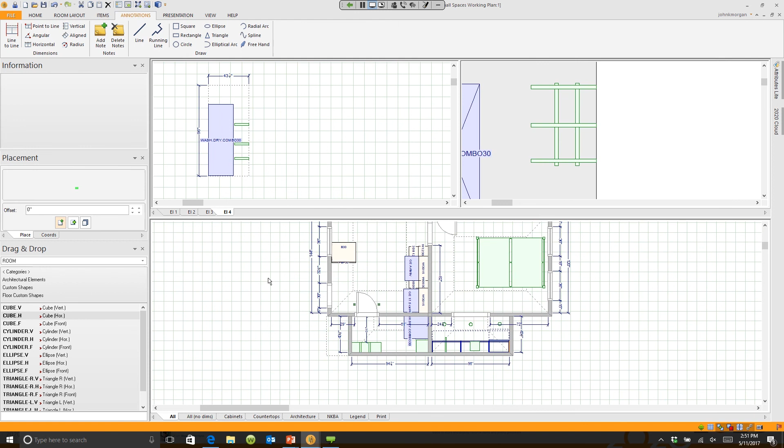So let's go ahead and back out of here, and let's zoom back out. And let's go back into our plan, and let's go to the next item, which is bathrooms. Let's talk a little bit about bathrooms. There's a lot you can do in a similar space if you keep the floors the same and add things like these glass panels. Let me show you how I would do that in

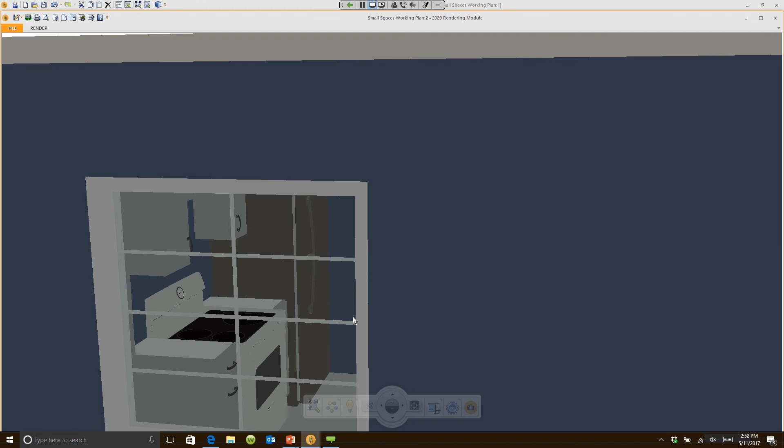2020. We're going to come back out of here, and let's zoom back over here to our floor plan. And let me go back. Let's go back out of our plan here again like we've been doing. And let's turn back to the bath item. And we are, whoops, hold on just a second. I got myself even confused on that one. So we'll turn back down here.

And what I'm going to do is I want to look into the room first, and then I'll show you some of the things that we can change. So we'll walk into the room. Hold on. I'm usually a little bit smoother about that. But when you look in this room, you'll see that we have a shower.

I was playing around with somebody earlier today, and I left the dog standing in the shower.

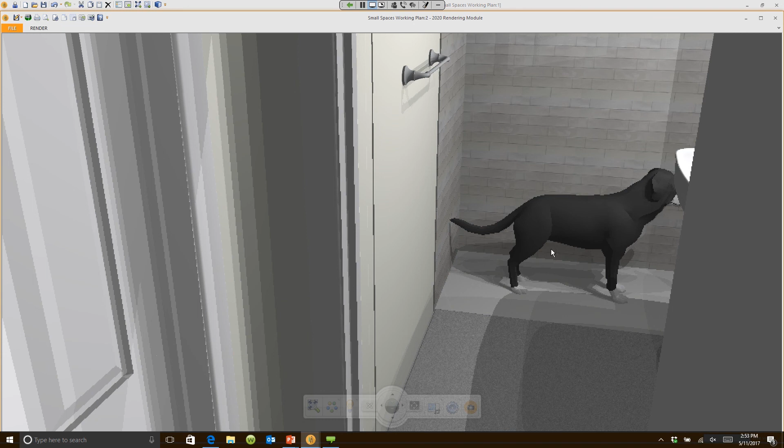Shower's not turned on yet. You'll see that we have handles on the right-hand side. If I walk in a little bit further into this room, you'll notice that there's a drain in the floor. And on the right-hand side, if I walk in a little bit further and I turn, you'll notice that there's a Kohler sink, Kohler toilet, and everything in this room.

Now, how did we place these items? First of all, let's talk about the drain. The drain can be found in the room plumbing catalog. So if I come back over here to my catalogs and I choose room plumbing, I'm going to go down here to where we have showers, toilets, bidets. You'll see where it says faucet, manual placement. That's where you find things like drains because you can manually place these. You can also place things like shower and bath faucets, shower heads and faucets.

You know, if I go in and choose, let's say, a tower shower head and faucet, I can drag this over to the plan, right-click to turn it the direction I need it to face, slide it over, snap it right into place. And if we come back in and we take a look at this, I can tilt this and look up. There's my tower.

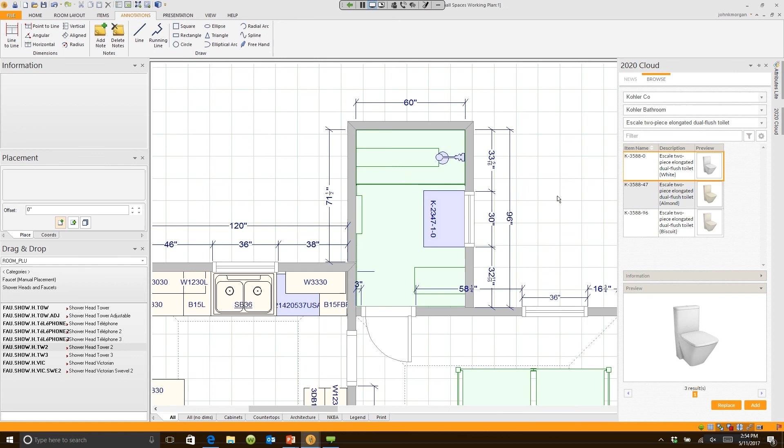Now, where did I get the Kohler stuff? That's pretty simple. You've already seen me go to it a gazillion times. I use it all the time, the cloud. If I come over here and I click on catalogs, there's a Kohler catalog. If I click on the button, drop down here to Kohler, click on it, you'll see toilets, bidets, pedestal sinks, bathtubs, showers, and on and on and on. They're all listed here. I simply drag those over into the room. I don't have a lot of room for a cabinet, but I did have room for that pedestal type sink.

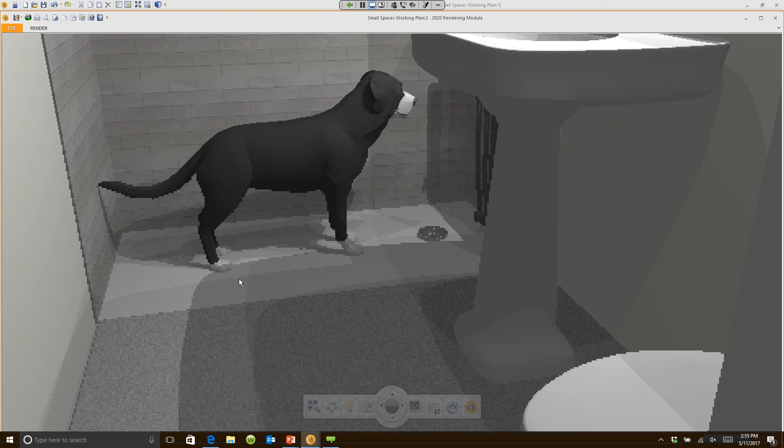Now, what I came in here really to show you was how to put that glass panel in. But before I put the glass panel in, I want to talk a little bit about the floor. If you take a look at the shower wall and the shower floor, I often get questions of how is the floor two different materials here? I have a shower material, floor material, but they're on the same plane. Well, that's pretty easy too. Let me show you how I do that.

Do you remember under the room catalog? I'm going to come back here under room, and this works on the walls too. Remember the room catalog where I chose, give me 1 second here, where I chose the architectural element and I went to the custom shape? Well, they have floor shapes too. I can grab a floor shape. I can drop this on the floor. I can double click on it.

I can go in and say the width is 36. Let's say it's 60. Width is 60. The height is 0.25. I always make it less than an inch. So 0.25. I always use 1/4 inch. And the depth on the item is going to be, let's say it's 36 inches. Now, when I click on that, I have a floor. I can go back to variables. Again, I use variables all the time.

Click on the texture button, and I can either use a generic texture, or I can go to the textures I've already used in the drawing, or I can go to textures that I loaded from websites. These are textures that I downloaded from tile sites. So if I clicked on that tile, there's my floor, and that's what my floor would look like in my bathroom. That's one way.

Here is another way. This is my favorite way, actually. Items. I go over to Surface, and I click and trace the room. I'm going to do it in the kitchen. Trace, click, click, click. Everywhere there's a turn, I'm clicking. We're going to go all the way to the end of this wall, click, all the way to the corner and click, all the way up and click, around the base cabinet and click.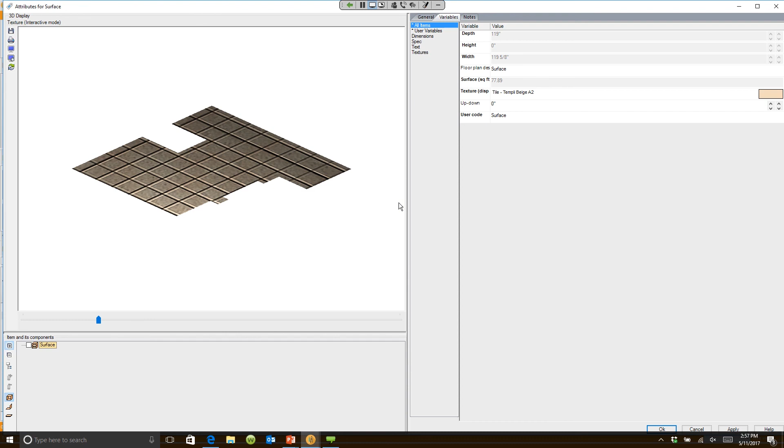Now, a lot of times we would do this before we even put the cabinets in, but I've already put the cabinets in. This gives you a trace of the floor. I can click on the Browse button. I can go into Textures and scroll down and find one of the textures in 2020 or one that I've imported. I have a walnut type wood floor here. I'm going to go ahead and click on it. There's my floor. That's what the floor is going to look like in my kitchen that fast. All I had to do was go over here to the surface button and trace the floor area.

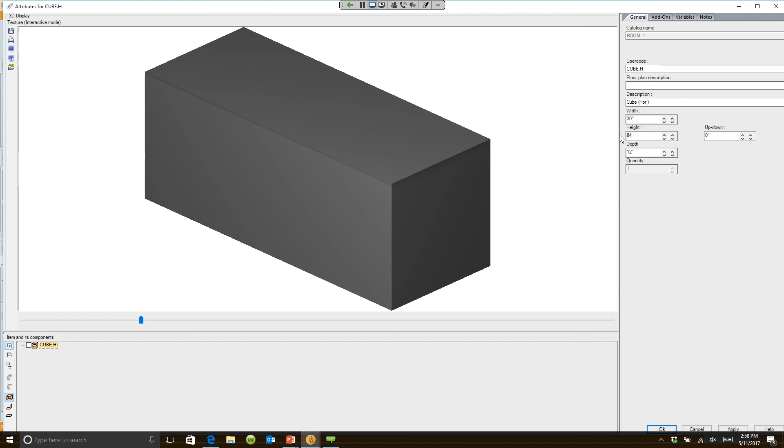The height is going to be 84 inches. The depth will be 0.25 inches. Actually, no, we don't want quarter-inch glass, do we? We will get in trouble for that. So either half inch, 3/4. I'm going to go to variable where it says obstacle color. I'll click this, and again, all the generic textures are here. All I have to do is say, I want glass, furniture, generic, glass, clear. I'm going to go ahead and go with clear glass, click OK.

This is now see-through. I took that solid object that I made a floor earlier, I made a wood shelf earlier, and if I come back in and take a look at it, there's actually a glass. Oh, hold on a second. I didn't float it over yet, did I? Here we go. I'm going to hold the control key to move it into place and break the barrier. And I'm going to snap it into place. We're going to go ahead and take a look at it. And there is now glass in between.

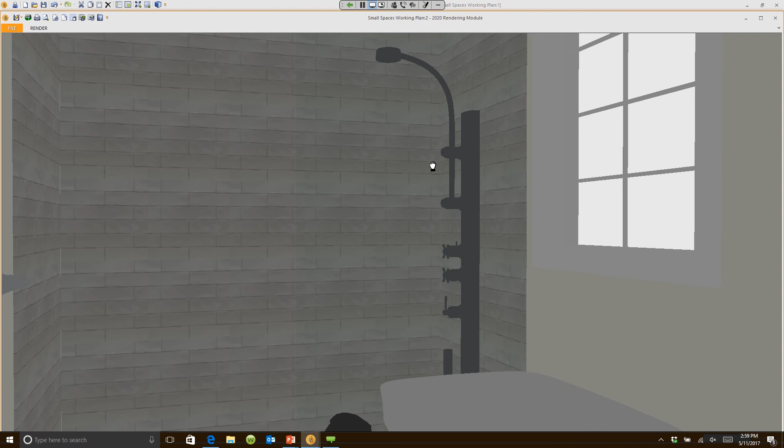Matter of fact, you can see the light reflecting off of it. If I move up just a little bit and we tilt down just a little bit, maybe that'll help you see it a little bit better, you can see that there's now glass. Doesn't go all the way to the ceiling. 84 inches up, I now have glass in that room. I used an obstacle to change that again.

Now, I'm almost at the top of the hour, so I'm going to throw a warning out to everybody. I still have a couple of things I want to do. I'm running probably about 10 minutes behind. So, Amy, just throwing that out to let you know that I'm still going to go for 10 more minutes unless you stop me.

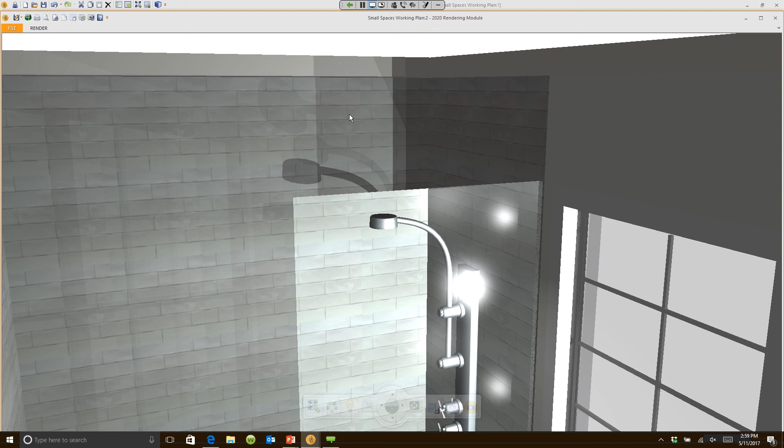The purpose of the countertop is also for being able to prepare your food and sit and do your work, and there's all sorts of things that you're going to need to do at this countertop. So I'm going to show you how I would build something like this and put stools around it just like Jared did here. So let's come back into our drawing and let's move back over, and you'll notice in this room that I have a little island in here.

Now you're going to look and say, hey, there's a lot of room here. Well, there's really not a lot of room. If I come over here and I say annotations and I do some dimensioning, let's say I want to know how far it is from here to the edge of the back of that island. It's only 25 and a half inches. There's not a lot of room. And this door, if I were to open this door, let me go in here and open this door for a second. So let's go in and let's go to attributes.

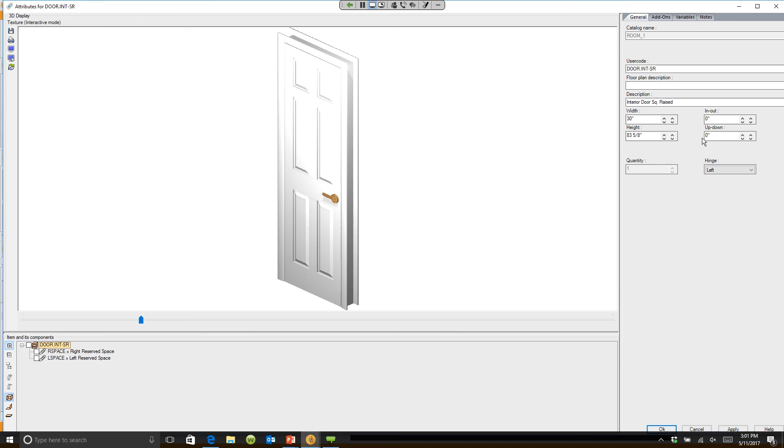Because it's not just the overall physical size of your room, it's all the things in your room. So if we went in here and we have all these doorways, we have all sorts of obstacles that are naturally created by the doors and the door openings. You can see the doors here, how they're placed. So I do have a good clearance of 25 inches. I have a good walk-through space here, but I really don't have a lot of storage. So putting just a base cabinet in here where we could store things is awesome, and it sets up a center where we can both prep food and eat too, because there's not a lot of space for a table.

So typically, when I place countertops, I use the countertop wizard. 99 out of 100 times when I place countertops, I use the countertop wizard. I never, ever, ever use countertops and trim. And the reason is, when I use countertop wizard, I'm actually using real companies' catalogs. I'm using Metro Quartz. I'm using Cambria. I'm using Silestone. I'm using, name them, on and on and on.

Now, this is one exception. If I wanted to place a countertop right here, I would actually click on this button here. I would scroll down to a catalog called RoomTop. RoomTop is a generic countertop program. I can go to RoomTop. There's a feature here that says countertops. I always choose a square foot top, and here's why. When I drag and drop a square foot top, it never puts seams in or gives me the hatch marks telling me a piece is too big or such. I have the flexibility to do anything I want to this.

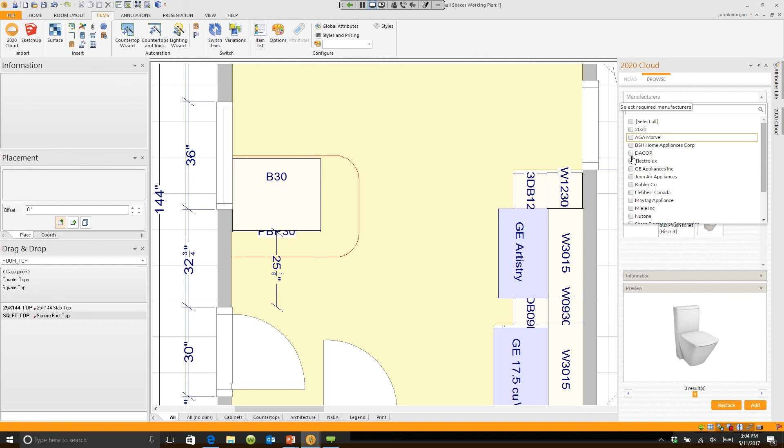I can actually go over to my cloud catalog again. I know everybody's seen me go to this a million times, but let me go over to my cloud catalogs again and choose a different manufacturer. Let's go back to 2020. Let's choose something like chairs and stools, which will be, as I scroll down, there should be something here called chairs and tables. Let's go down to stools.

I'll scroll down and we'll grab a stool. Did that probably too fast. Let's just grab a small one. There we go. Let's just grab this one right here. It has a small footprint. We'll click out here. We'll go ahead and we'll add one.

And let me see where I just added that. Hold on just a second. Let me do that again. Let me go ahead and hit add. There we go. We can move this stool and have it face any direction that we want.

I'm going to turn this to face this direction, and I'm going to duplicate it. I'll say duplicate, and I will right-click and duplicate again, and I'll simply drag these into place. I'll drag one over. I'll drag this one over, and this one's going to be facing the wrong direction, but because I'm late, I'm just going to leave it.

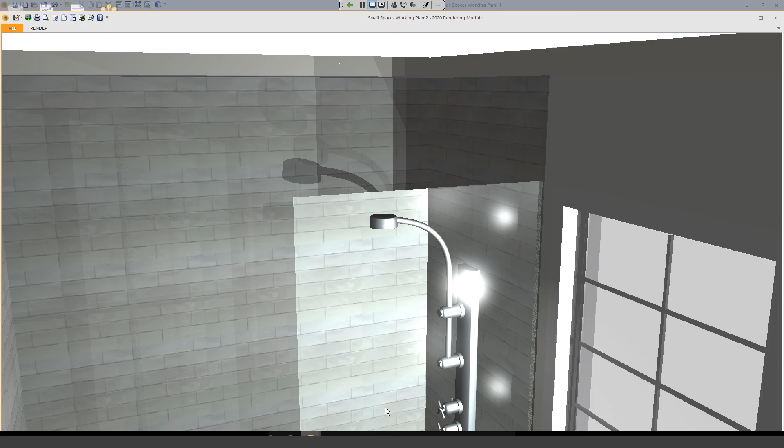When we come back in and we take another view of this, let's zoom up. Let's take a look at it. Oh, you know what? I have my door open, don't I? So let's zoom into this room, and I'm just going to tilt down a little bit here. And you'll see that I've placed that countertop. Now, obviously, that's not a real pretty countertop. I haven't put the other countertops in.

If I wanted to change that countertop, all I need to do is right-click on it, highlight it, go to its attributes, go into variables again for the millionth time. I'll click on this. I'll simply come over here and say, let's just put stone on this. Right now it's got a laminate, so we'll put some stone in. I like the Carrara under the marble section, so I'm just going to put Carrara in. We'll click OK.

And then if we take a look at this again, you'll see that I have a more realistic countertop in there too. So it's pretty quick and easy to be able to do that. Now, let me show you the last two items, and both of these are really quick. Oh, by the way, notice how awesome my floor is now, the one that I traced and added before. All right, so now let's take a section. Let's move in here a little bit, and actually let's move up. And I want to look at this side of the wall.

One of the things I saw online that I really didn't think as much about was the fact that walls are storage too. I think of walls as having shelves and cabinets and so forth, but it was talking about maximizing your wall space. Let me show you how you could do that in 2020. We come back out, go over to our floor plan. There is an option under items called SketchUp. If I click on SketchUp, it takes me to the 3D Warehouse.

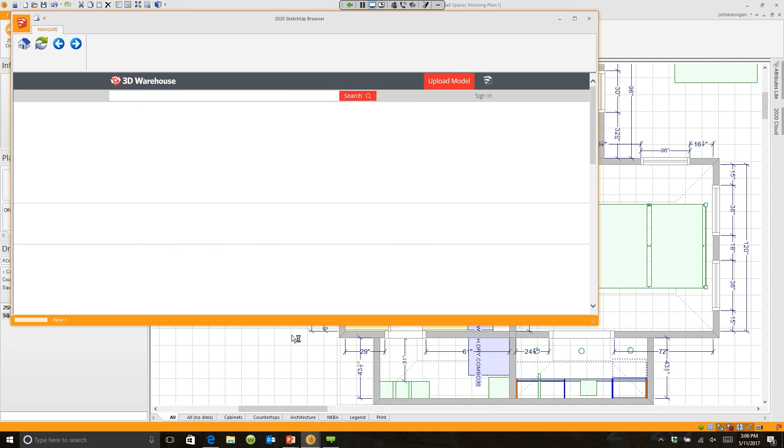I can type in just about anything you can imagine. I could type in, let's say, pot rack. If I type in a pot rack and click on this, you'll see here that there's probably thousands of pot racks in this list. I can click on one. I can say, I want to look at this pot rack right here. I can actually take that, download that, and put it in my 2020 drawing.

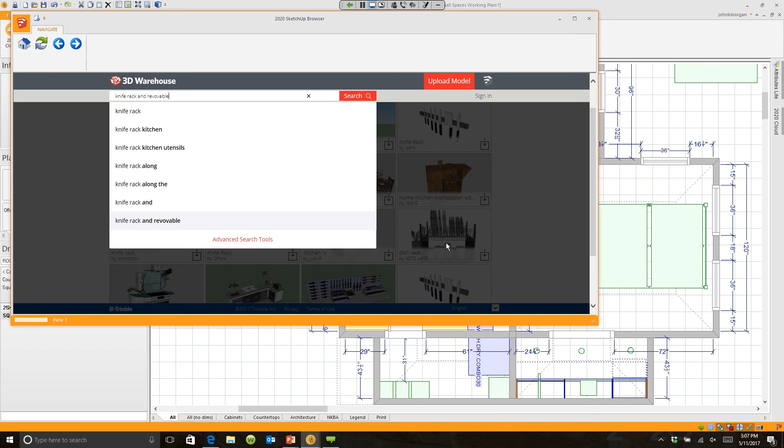Let's type in knife rack, like the picture we just saw. Again, knife racks will appear. I can go down and make a selection. I can choose a knife rack. I can click download. I can say SketchUp 2014. By the way, right now you want to download SketchUp 2014 models only. Don't try the 16s or 17s yet. You'll get an update from us shortly where you'll be able to do that as well.

I'm going to go ahead and place this on a plan and turn it. I'm going to slide it right up against this wall. And when I place it, I'll right-click on it one more time because I want to move it up and down, because right now it's on the floor. I'll say, let's make this 47 inches off of the floor. And if we go back and take a quick look, I've added the knife rack to the wall. So now I'm maximizing my walls in my small space.

Very cool. Now, last item, very last item, and then I am going to do any catch-up on questions and so forth. 11.7. Everybody watching me right now, raise your hand. Who has loaded 11.7?

All right, right now I can tell you it's only about 23% of our users. 11.7 is only a couple weeks old, but you need to load it immediately, and here's why. There's one huge, huge feature. It's actually the best feature that's been added in probably at least 5 years, and this is going to change the way you work. This is phenomenal.

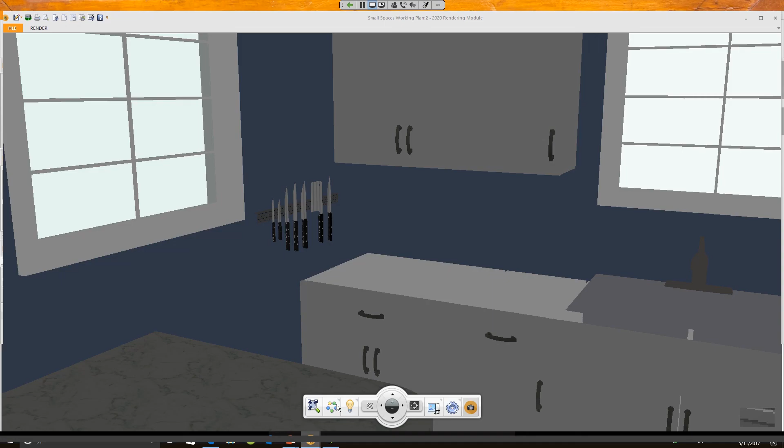And you know what's really awesome about that feature is that when you tell it to make a 360, a virtual reality, or a high-definition image, while it is building that image, you can actually go back to your floor plan and continue working. I can go add cabinets, delete cabinets. I can draw a brand new kitchen. I can open up 3 more plans. I can start 2 more renderings. And the whole time I'm doing that, it's rendering. If you notice the words here, it's rendering in the background.

So now you have the ability to create these awesome high-end images for anybody that you want, and you're no longer worried about it prohibiting you or limiting the work that you can do, because it does it somewhere else while you continue working. You'll actually see down here at the bottom of my screen, it's actually building this image. Notice it's building the image while I can go in and add other items.

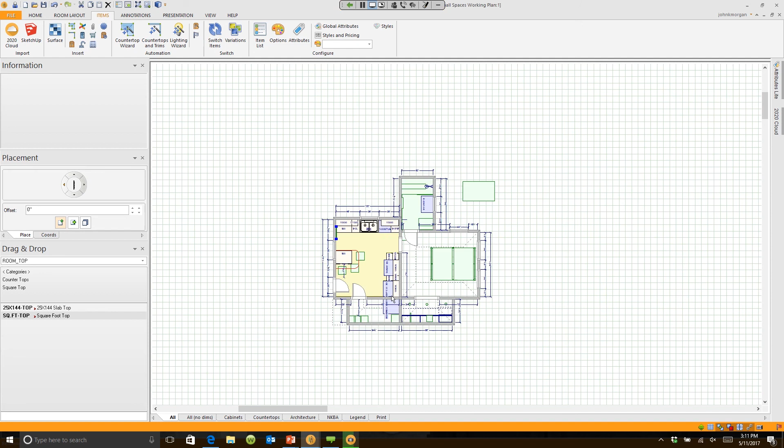I can go grab a square foot top, or I can go in here and say I wanted to get a countertop. I want to go into a predefined top and grab a 45-degree top and drop it on my floor plan. I am working while it is rendering. That is truly, truly a game changer. If you haven't downloaded 2020 11.7 yet, you got to do it now.